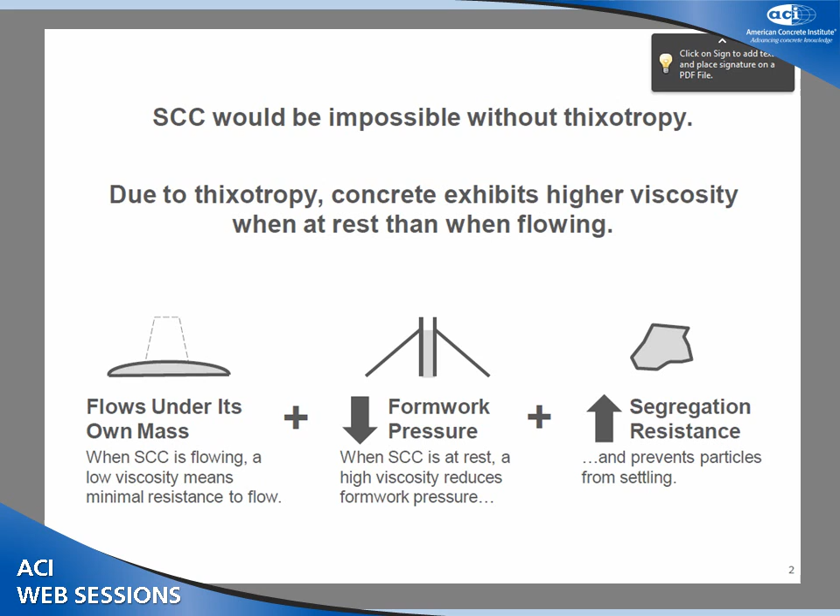So our concrete, as you can see at the bottom, can be very fluid. It can flow under its own mass, so it has a low yield stress, low plastic viscosity, and it can do everything we expect out of SCC. But by having that thixotropy there, we're able to reduce the amount of form pressure to make concrete more practical to place, and we're also able to increase our segregation resistance. So thixotropy is very critical, and that will be the focus of my presentation.

So the first thing I'll talk about is what is it? I'll define it. I'll talk about different options for measuring thixotropy. I'll also talk about how it relates to form pressure, show some field data, and then have some conclusions. So first of all, what is thixotropy? Here's the scientific definition. ACI Committee 238 on workability is developing a tech note on thixotropy. We're very close to getting it to TAC to review, so it hopefully will be published in the next 6 to 12 months. But this is the definition that we use in that document.

So thixotropy is the reversible isothermal time-dependent decrease in viscosity when a fluid is subject to increased shear stress or shear rate. So that's a long definition. Let's talk about the different components of it. So first of all, it's reversible. That means that when concrete is at rest, the viscosity builds up. When concrete is sheared, viscosity decreases. And we can continue that process back and forth, and it's completely reversible.

Second part of that is it's isothermal. So when the temperature of concrete changes, the viscosity will also change. But in our case, that's separate from the effects of thixotropy. So shearing the concrete can create heat in the concrete, and it can affect the viscosity. That's not thixotropy.

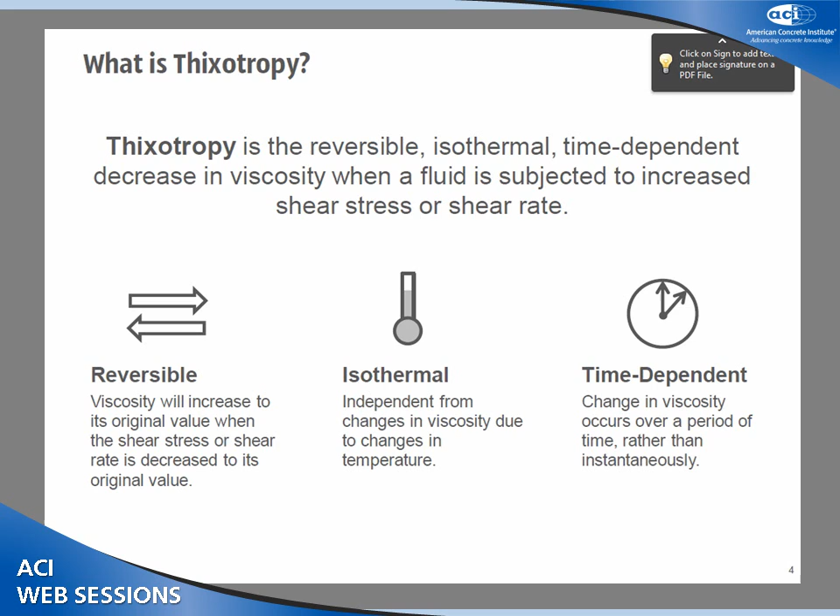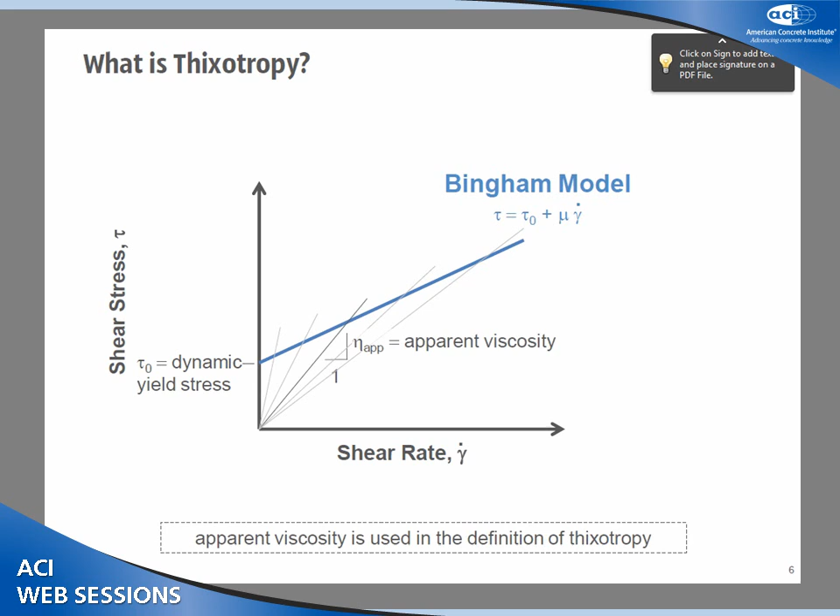So when we talk about thixotropy, we have a material that's at rest, and we begin to apply shear to that material. When we initially apply shear, we're going to get a higher shear stress. And so if I run a test in a rheometer, what I'm typically going to do is increase my shear rate from 0 to a maximum, and then back down to a minimum. So if I have my up curve where I'm coming from rest and I'm increasing my shear rate, I'm going to have a certain shear stress with that. The longer I shear it and there's a breakdown of the thixotropy, we're going to have a lower value on the way down.

And so when we typically go into a rheometer and measure the rheology, we're normally measuring this down curve to get the yield stress and the plastic viscosity. Then the area between these two curves is defined as the thixotropy. So the bigger that area, the more thixotropic the concrete.

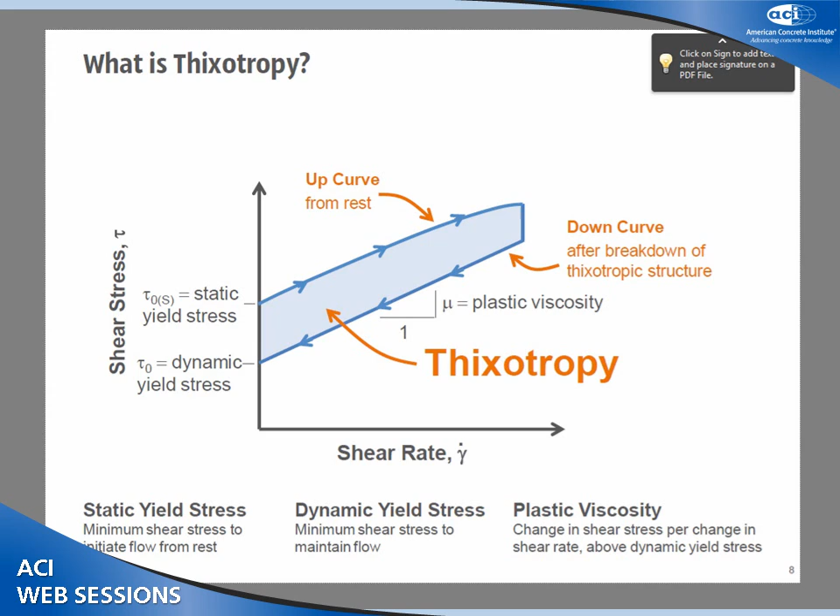So we have a number of terms here that we can define. We have the thixotropy, which is the area between the two curves. We have the static yield stress, which is up here. This is the minimum shear stress to initiate flow from rest. Then we have the dynamic yield stress, which is the yield stress to maintain flow once we've broken down that thixotropic structure. And then we have plastic viscosity, which is the slope of the line, and we always take that from the down curve.

So if you think about thixotropy in time, we'll go through this A, B, C, and D. So on the bottom is the shear rate that I'm applying. On the top is the shear stress. So if I start out with a material that's at rest at point A, and the thixotropic structure is building up, I begin to apply a shear to that material, and so I go up to B. You can see what happens when I go to B is that I get this high shear stress, and as I continue to shear it, that shear stress drops, and that's because the thixotropic structure is being broken down.

And then I can remove that shear from the material, or I can reduce it. So that's what I'll do at C. I'll go from a high shear rate to a low shear rate. So I'm still applying shear. I'm still going to have a shear stress that I can measure, but I am going to see that it's going to increase. The shear stress is going to increase over time because I'm applying a lower shear rate now. And because I have a lower shear rate, I'm going to have a partial rebuilding of some of that thixotropic structure.

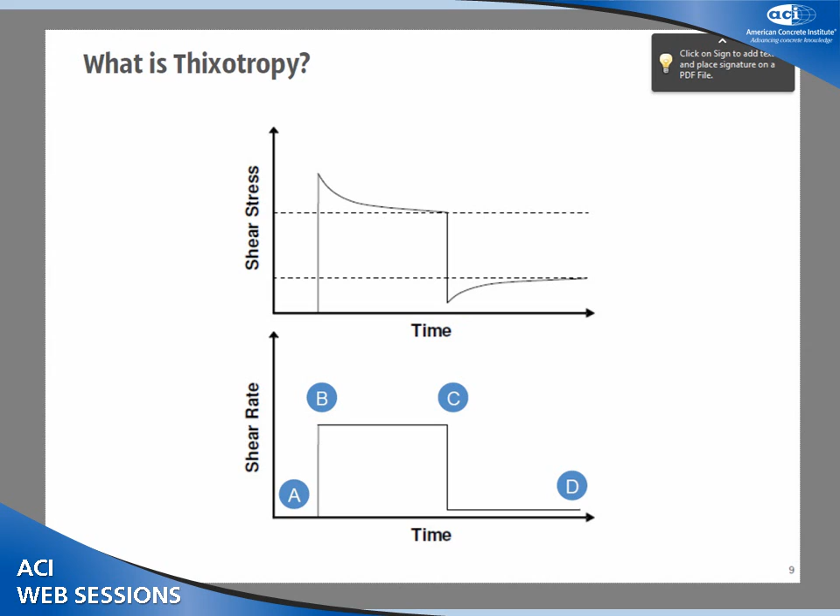So now, before we talk any more about thixotropy, let's talk about some distinctions of what thixotropy is versus what it's not. So first of all, thixotropy is not hydration. The viscosity over time is going to increase because of hydration, and that's not covered in thixotropy. Also, during a test or during a placement, you could have segregation of the concrete, and you're going to have a paste-rich region and an aggregate-rich region.

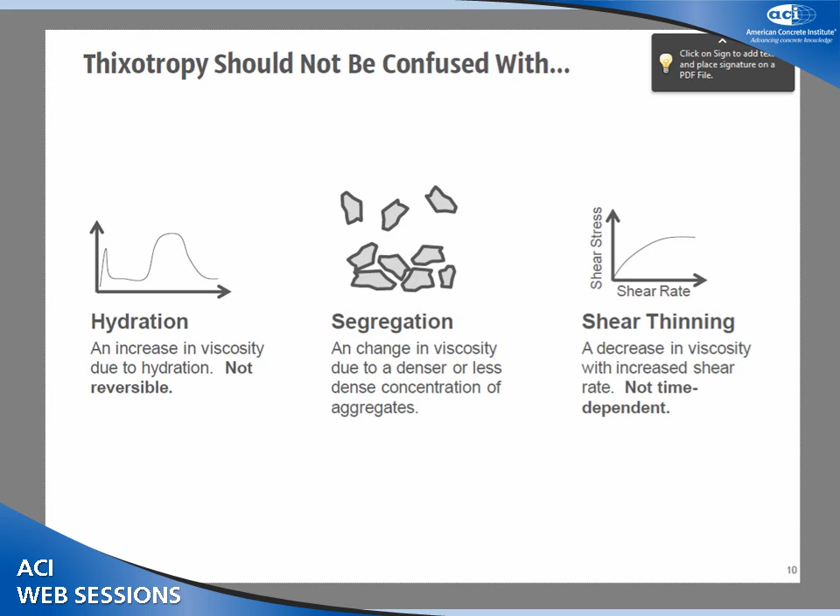That's going to affect the viscosity, but that's not due to thixotropy. And then also, we have what we call a shear thinning fluid, which is where the shear stress and shear rate curve decreases, the slope of that decreases with increased shear rate. And so this is not time dependent. This is behavior that we would see over a short period of time. So shear thinning and thixotropy are two things that a lot of times people get confused, but those are different things.

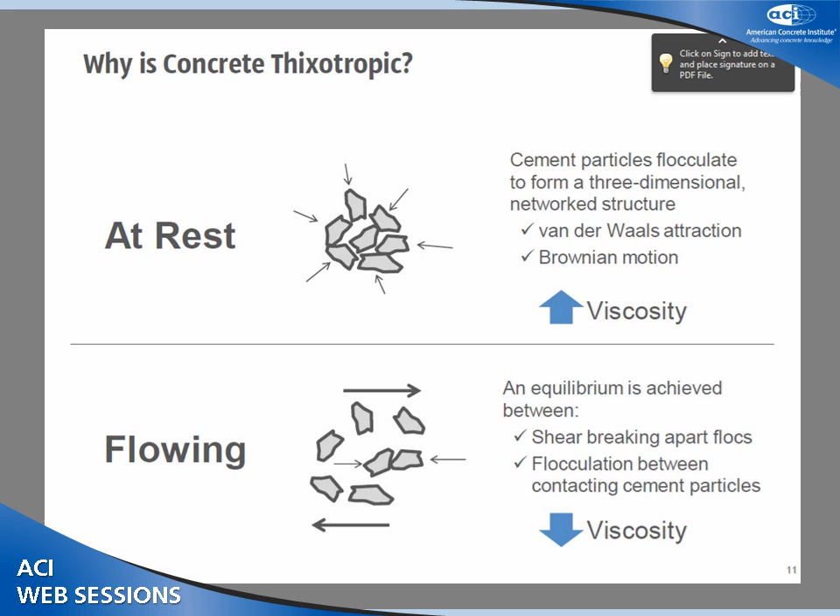So next, why is concrete thixotropic? Well, the reason is that when concrete is at rest, it forms a three-dimensional network. There tends to be flocculation due to van der Waals attraction and Brownian motion. Particles stick together, they form a structure, and that structure causes an increase in the viscosity. When concrete is flowing, on the other hand, we begin to break apart those flocs. And so we have shear that's breaking apart the flocs. We also have particles contacting each other and having some flocculation. So the net result there is a decrease in the viscosity.

So now, how do we measure thixotropy? So there's a number of different methods. I'm going to talk about three of the most common methods, and all of these methods, I'll point out, make use of a rheometer. So today, our session is talking about field measurements of thixotropy, and there are several rheometers that can be used in the field. As part of a project, you can use the rheology to correlate to the formwork pressure.

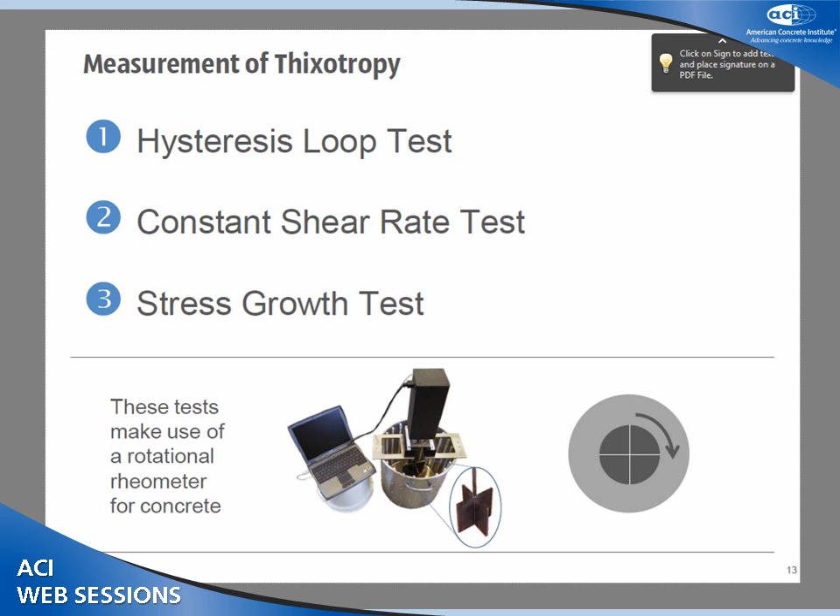And this is the one here that's used in the data that I'll show later. This is the ICAR rheometer. So it's basically a vane inside a larger container, and as that vane spins, we apply shear across the material. So the three methods I'm going to talk about are the hysteresis loop test, which I showed a little bit before, the constant shear rate test, and the stress growth test.

So, like I said, you've seen this before. This is a typical rheometer. We increase the shear rate, and then we decrease the shear rate. And we measure the area between this curve. So initially, the concrete is at rest. We increase from 0 to maximum. We hold that maximum shear rate constant for enough period of time to fully break down the thixotropy. And then we decrease the shear rate back down to 0. And we calculate the area between the up and down curve. And the bigger that area, the greater the thixotropy.

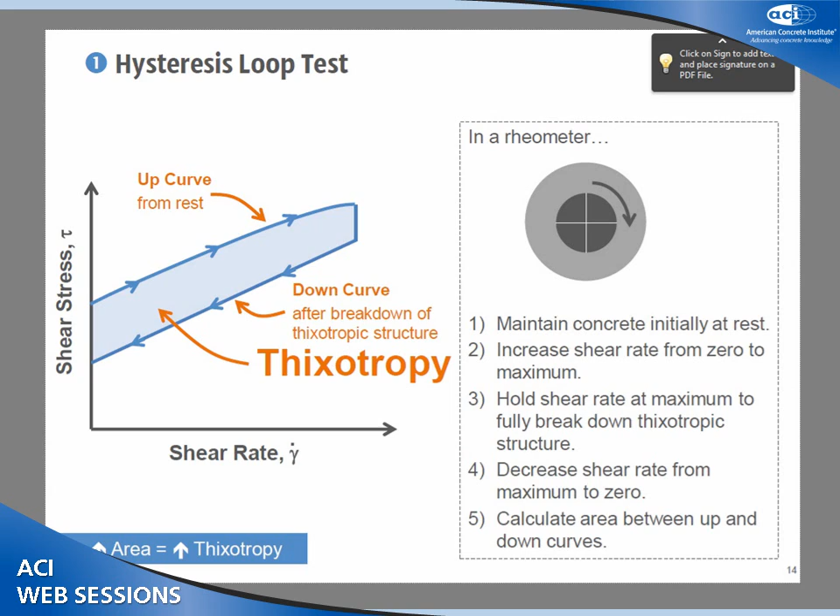The next test is a constant shear rate test. And so what we do here is we measure the shear stress over time. So again, our concrete is initially at rest in a rheometer. We apply a constant shear rate to that test. And we look at the change in shear stress over time. So as we go from an initial shear stress from rest to this equilibrium shear stress over time, the difference between those two is the amount of thixotropy. And the greater that difference, the greater the thixotropy.

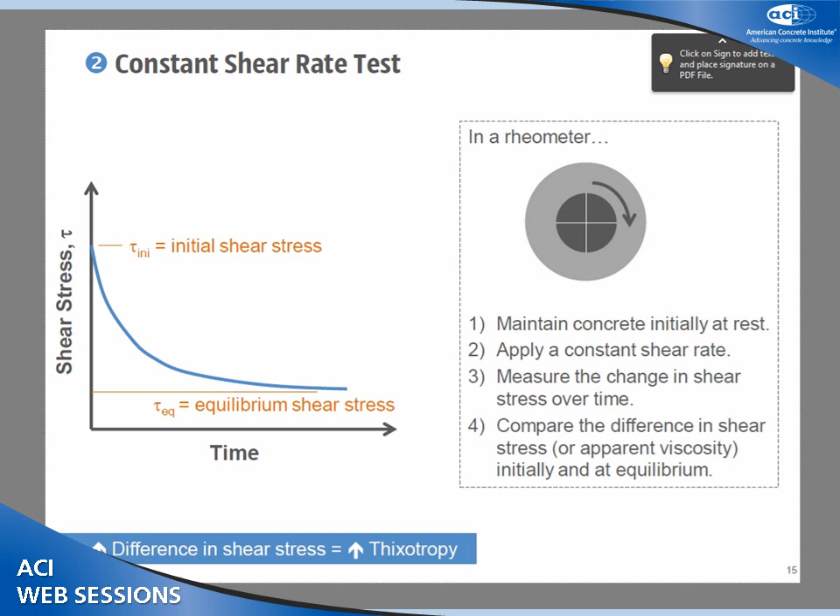So one note of caution when you are measuring thixotropy is that it is very important that the concrete be handled consistently from test to test. So taking the concrete, putting it in the rheometer or whatever other device is being used to measure thixotropy, having it there for a consistent period of time, and then when you actually run the test, running a consistent protocol every time so that the results are comparable.

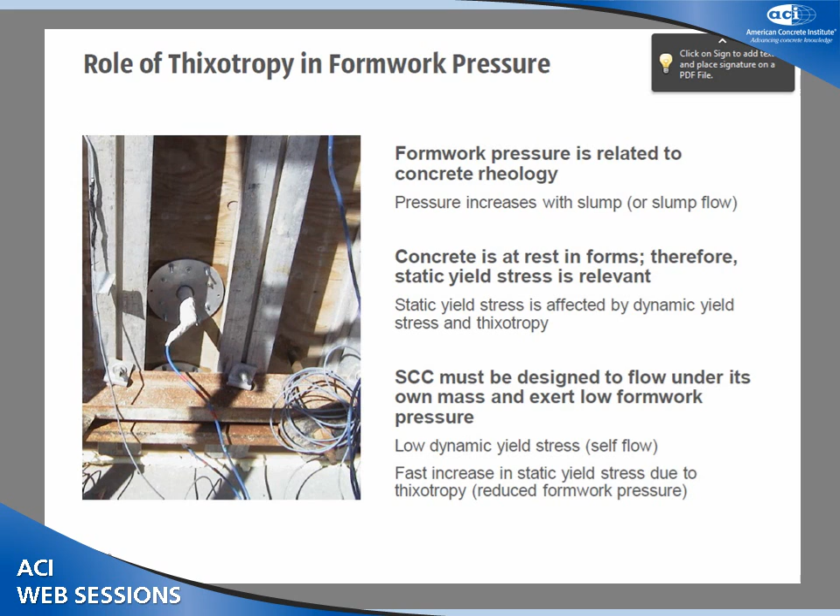So when we're designing an SCC mix, we're making this trade-off. We want a low dynamic yield stress so it flows under its own mass, self-consolidates. On the other hand, we need a high static yield stress, and we can provide that through thixotropy.

So if we think about a typical concrete delivery from the time it's batched to the time it's in the forms and beyond, you can see what we have here is time from mixing and our yield stress. So if you think about our dynamic yield stress, we want the dynamic yield stress to be low, and we want it to stay low. But we want that static yield stress to actually increase. So when the concrete is in the forms, the black line is what's actually happening.

So we batch the concrete. While it's in transit, we're partially agitating it, so our yield stress is actually somewhere in between the maximum for static yield stress and the dynamic yield stress. Then we apply high shear, because right before we place the concrete, we're probably going to mix it. We're going to put it in a pump line. We're going to break down all that thixotropy. And then we get it in the forms, and that static yield stress starts to go back up.

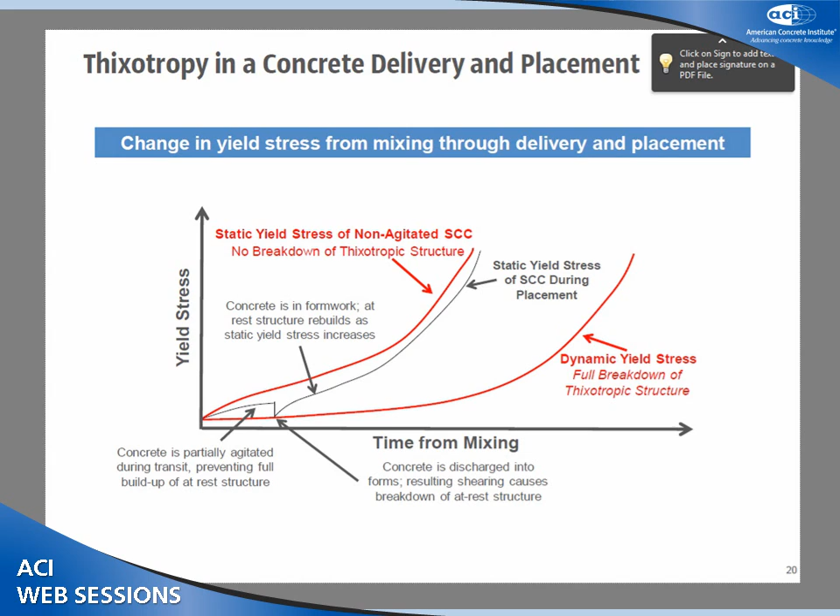And so if we were to go back and vibrate that concrete when it's in the form, or apply some kind of agitation, we would have a decrease in the static yield stress, and it would go back down to the dynamic yield stress. So again, we need thixotropy. Thixotropy is important. It helps us reduce the formwork pressure, but we don't necessarily want too much thixotropy. So there are disadvantages to having a lot of thixotropy.

We can have cold joints, for example, if we have two different placements of concrete that are coming together, and the first is very thixotropic, they don't blend well. And if we're not applying vibration, we don't have the opportunity to get those blended. Second is poor pumpability. So if you have this material that's at rest, you're trying to start pumping it, and you have initially very viscous material before you can break that down. Pumpability can be a problem, and then also restarting placement after rest.

So let's say you have the concrete in a bucket, and you're placing it with that method, and then you have it in the bucket for a period of time, and then you open up the bucket. If that thixotropy has built up, it's not going to have the same level of flowability as it did initially when you put it in the bucket.

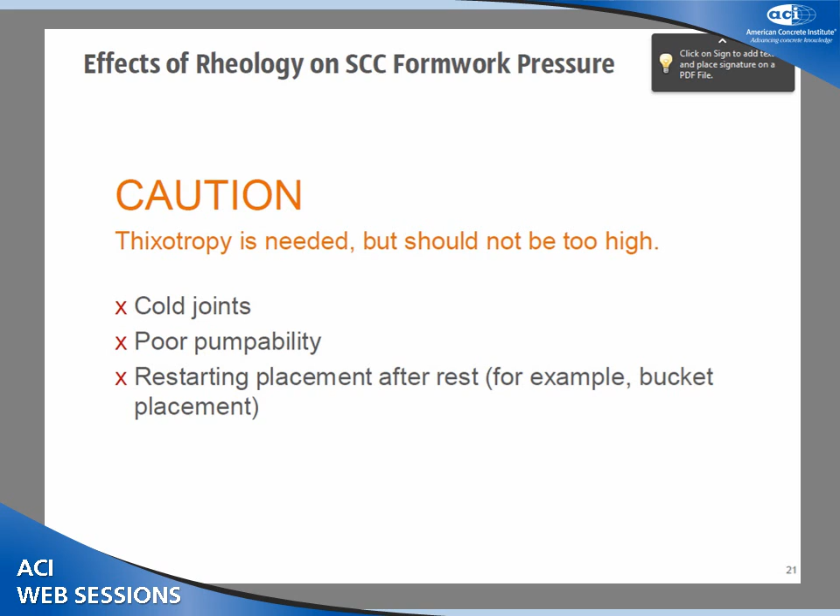So let's look at field data. I'll leave a lot of field data for the other speakers, but this is some work that was done actually with EllisDon Construction, and I have the reference here. You can see basically on the right are the measurements of the form pressure, and you can see, for example, here these are the different cells. As we initially place concrete in the forms, the lateral pressure builds up, and then it reaches a certain maximum, but then as we add more and more concrete, it continues to go up, but not at the same rate, because we're getting some of that thixotropic structure in the lower concrete in the form, and that is not giving us as much pressure.

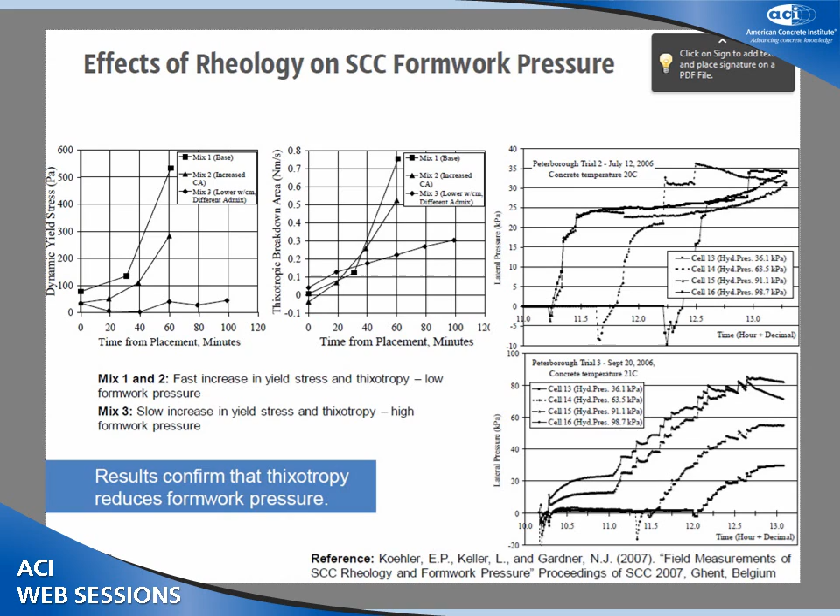So if you look on the left here, we have three mixes. Mixes 1 and 2, you can see, had a very fast increase in yield stress and thixotropy. So you can see this is mix 1 and 2 here, and that thixotropy increased very quickly. Mix 3, on the other hand, had a much lower increase in thixotropy over time, and so mix 3 had much higher formwork pressure than mix 1 and 2. So this confirms that thixotropy does in fact reduce formwork pressure.

So to wrap things up, first of all, we have to have thixotropy to make SCC practical. And we have our definition: it's the reversible, isothermal, time-dependent decrease in viscosity. And just as important as the decrease in viscosity is the increase in viscosity when concrete is at rest. To get to successful SCC, we have to balance the need for a low dynamic yield stress with a high static yield stress due to thixotropy. If you can balance those right, we'll get good self-flow and we'll have a reduction in formwork pressure.

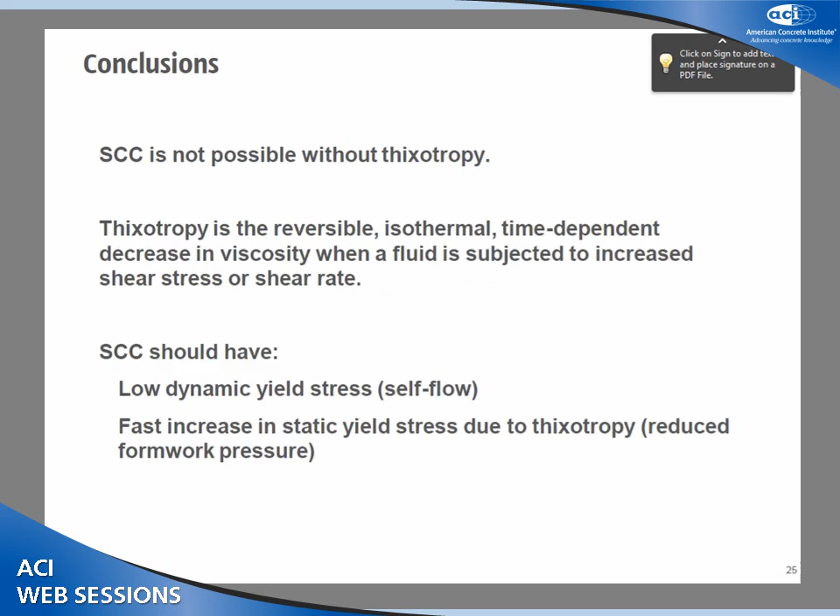Okay, thank you. Yes. In your stress growth test, can we use the ratio of the peak stress to the stress after it levels off also as an indicator? Normally that's not done. When you're running this test for the static yield stress, the geometry is well defined when you just start that flow, and you're calculating the static yield stress based on the surface area of this cylinder. So you know exactly the material being sheared, and you can do the calculation directly. As that material comes down and reaches this equilibrium value, you don't know the area or the volume of concrete out here that's being sheared, so you can't really do a direct calculation. So it goes from being a very direct, exact measurement to something that you can't really compare.